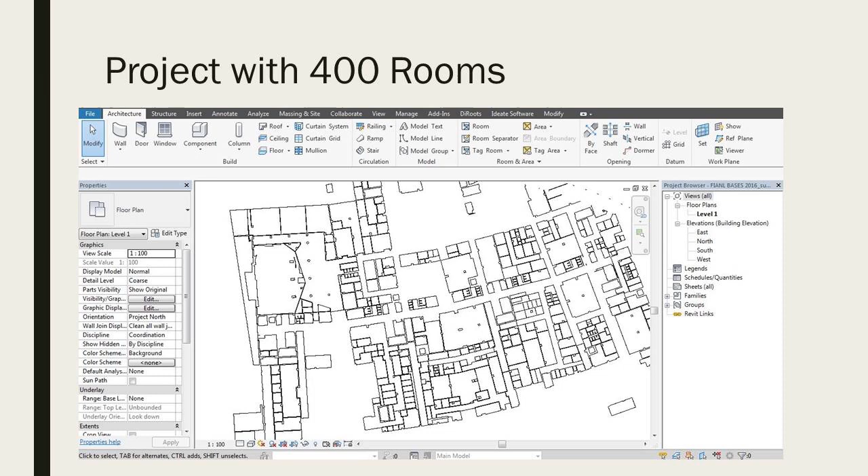We faced a case of a project that contains about 400 rooms in each level, and it was a big hassle when the architecture team started the detailing phase, which is creating the room finishes. The professional architect can create about 100 rooms per day, so we are talking about 4 days of donkey work to just finish this repetitive task.

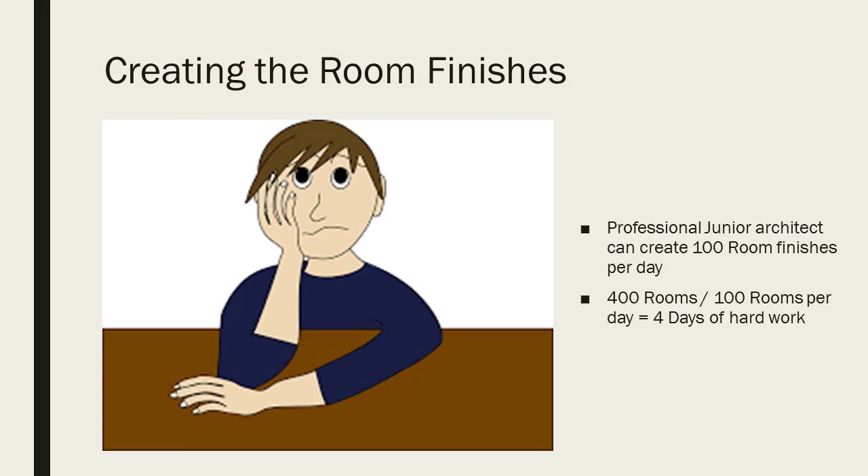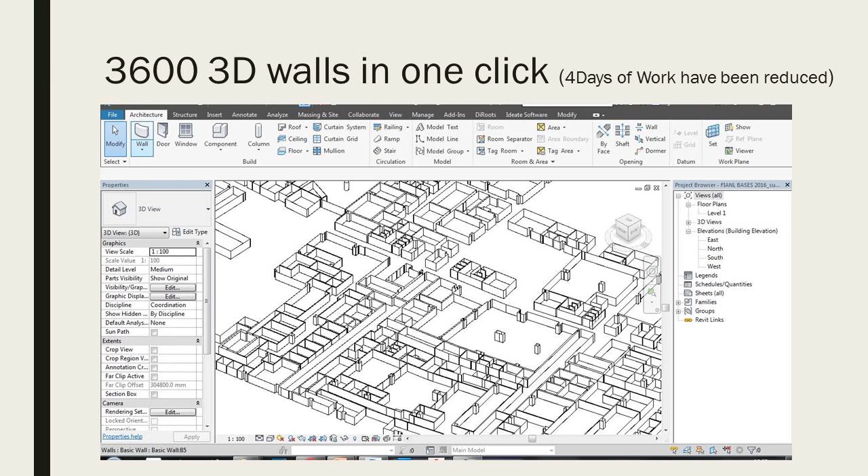But because we are developing on top of Revit with Dynamo and Python, we have executed this repetitive task by creating about 3,600 wall finishes in one time. Every wall had a specific type and a specific height, in just 10 minutes through a few clicks.

So what is BIM and what is the real value of AI in BIM, also what we can do with such a system, and what we have reached to now.

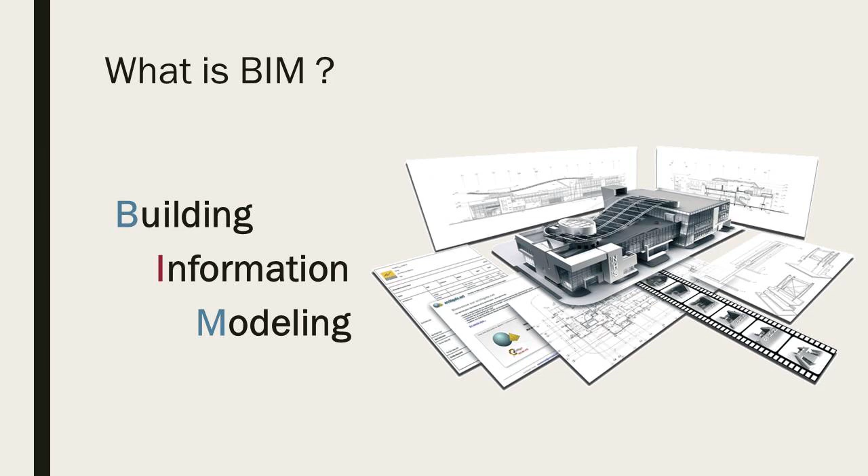So what is BIM? BIM refers to Building Information Modeling, but what does this actually mean? To clarify this meaning, let me ask you a question. What was the world's fuel in the 18th and 17th centuries?

Yes, it's coal. And what was the world's fuel in 1820? Yes, natural gas has been discovered. And so on. Humans discovered many ways of energy and fuels like solar power, fossil fuels, petroleum, nuclear power, geothermal energy, and wind energy.

But let me ask you, what is the real world fuel nowadays? The information. With a plentiful amount of information we can build smart cities and make things easy and available.

So the real power of BIM is in the information that is assigned to the building, leading the way to make the building like a puzzle. You only need to gather each part together, but how can we use this information?

First, we can use this information in the educational process by creating tools that can keep the architectural student on the right track by following up his design and checking it instantly, to correct him if he is messing up the proportions, for example, or the ratio of the openings in the building.

Second, we can automate the workflow of repetitive tasks that can be done with no effort, like the previous example.

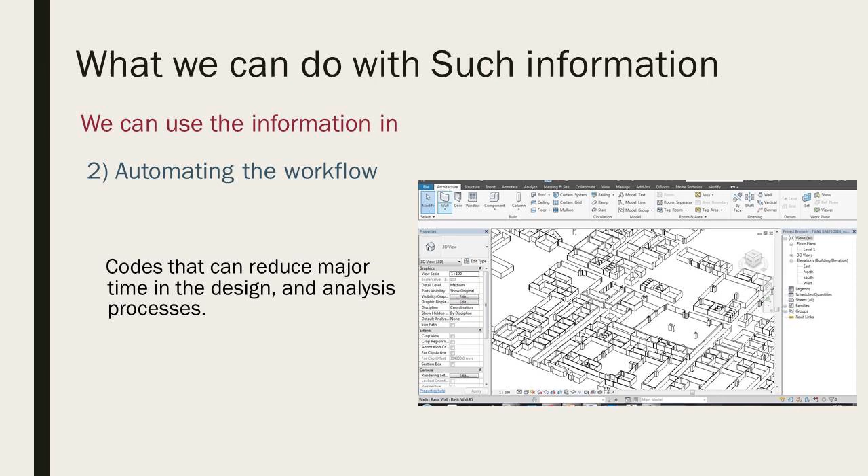Third, artificial intelligence could lead the way of the future by thinking and designing instead of humans. It can actually find the patterns and follow up to create what is required.

We have reached now 2 very strong scripts that can show a little bit of the future. The first one is creating automatic room finishes that can reduce a lot of time with no effort.

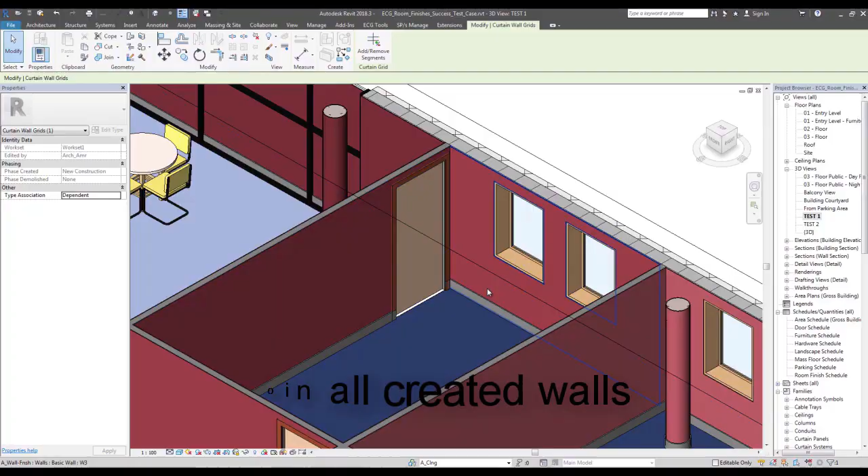The second script can automate the creation of foundations.

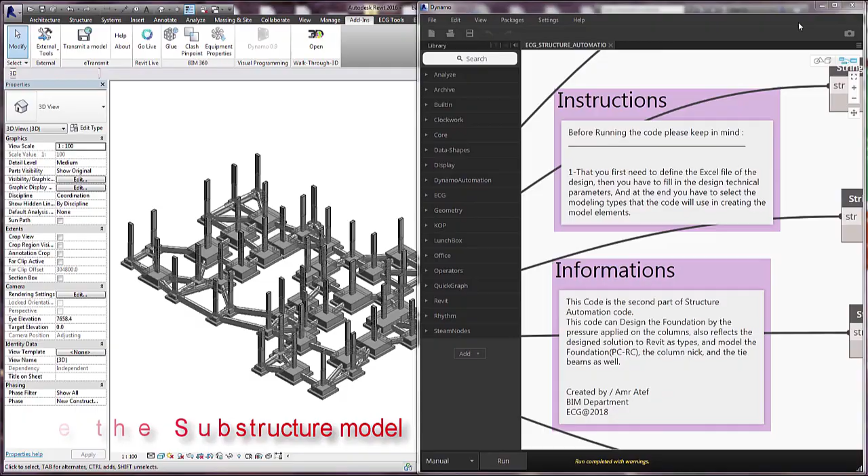Finally, we hope to reach the full automation process in the future. But would this revolution completely replace human tasks?